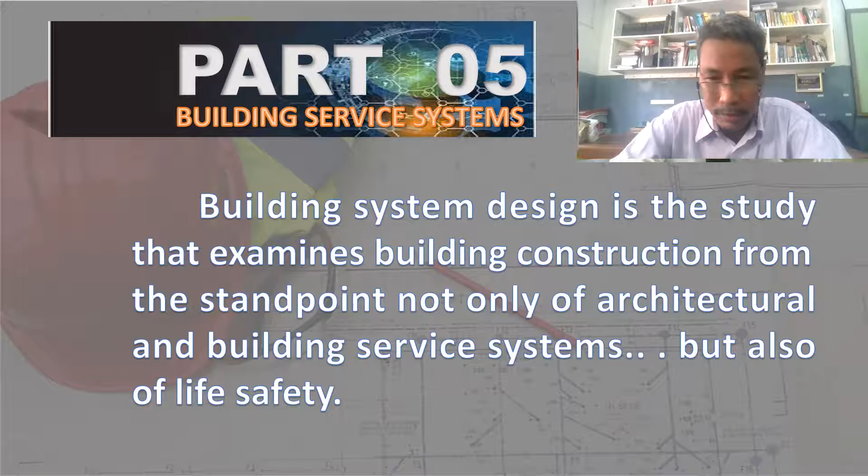I repeat, building system design is the study that examines building construction from the standpoint not only of architectural and building service systems, but also of life safety. So what I'm talking about from CHED CMO is they indicated 5 different service systems: lighting systems, mechanical systems, plumbing systems, electrical, communication and security systems, and fire protection systems.

So they missed out something like sanitary. So there is what we call sanitary systems and sound or audio. There are systems that I know in practice, in personal experience, that we have to control the sound. For example, in a building with an auditorium.

So right now, I have a background, which is a webinar, a seminar in the auditorium with too much audio. Okay. So the audio is controlled beautifully. That's why it goes a long way. With a very small amount of energy, we can actually efficiently broadcast a very good quality of audio, like in our auditorium, in our background.

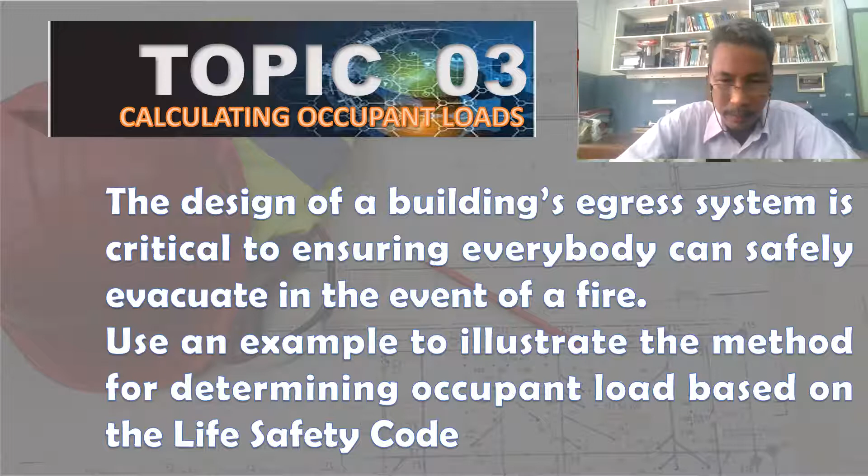And currently we are on number 3, which is about occupant loads and number of exits. In this topic, calculating occupant loads, the design of the building's egress system is critical to ensuring everybody can safely evacuate in the event of fire. We will use an example to illustrate this method for determining occupant load based on the Life Safety Code.

And at the end of this discussion, the student must be able to: A, calculate the occupant load; B, determine how many exits are required and how wide they have to be; and lastly, letter C, design the occupant load capacity of a building. So we'll start with letter A.

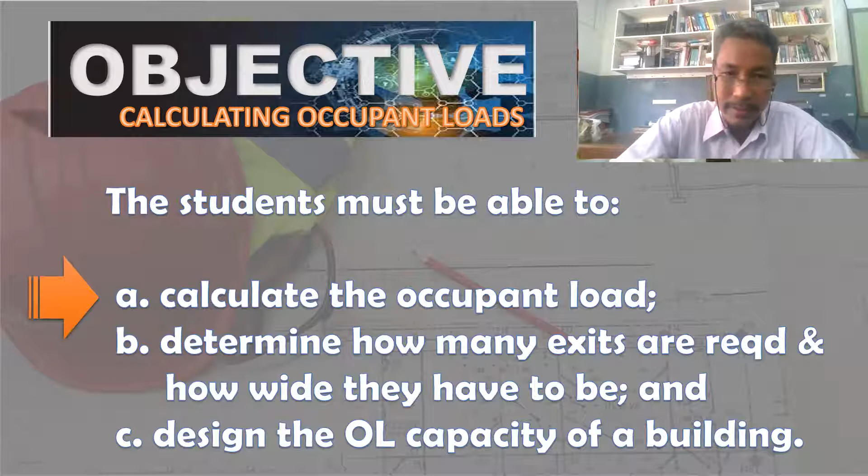So let's discuss what is occupant load. What does it mean, and what is its difference from building capacity or egress capacity of the building.

Technically, occupant load, or OL in short, is the capacity of means of egress for any floor, balcony, stairs, or other occupied spaces. And it shall be determined by dividing the floor area by the occupant load factor assigned to that use. So this statement can be converted to a very simple formula: OL is equal to floor area divided by occupant load factor.

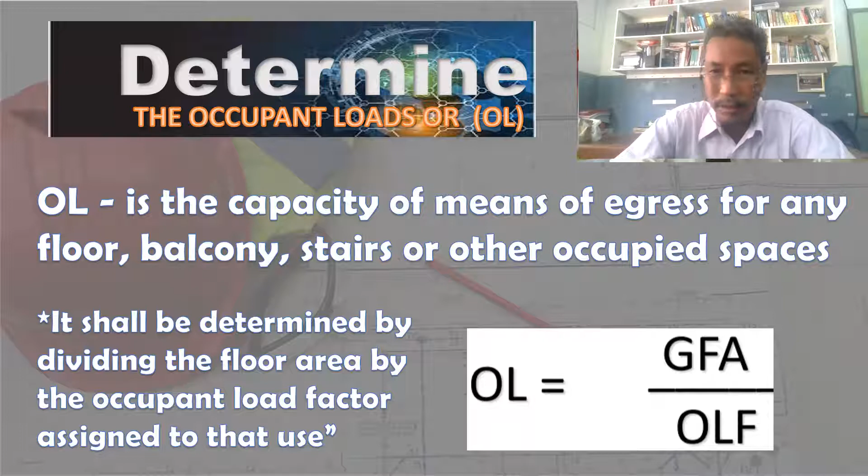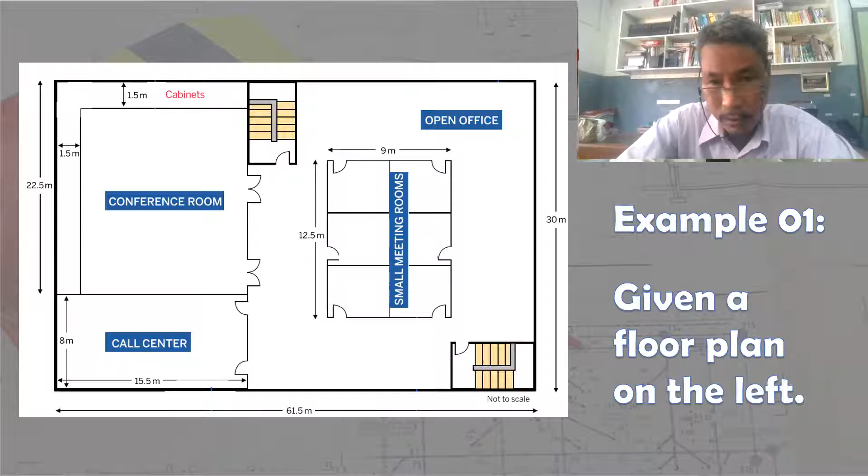So if you divide this space into 6 different small rooms, we can say that it is less than 41.8 square meters per room. So therefore, we will use the part of the table which specifically states collaboration room with less than 41.8 square meters in area, and that is 2.8 square meters per person as the occupant load factor.

Let us bear that in mind and go to step 2, wherein we actually select the occupant load factor, starting with conference room. So what is a conference room? A conference room is a place wherein there are plenty of people listening to a discussion or participating in a discussion. So therefore, a conference room is somewhat like an assembly of people. So assembly use.

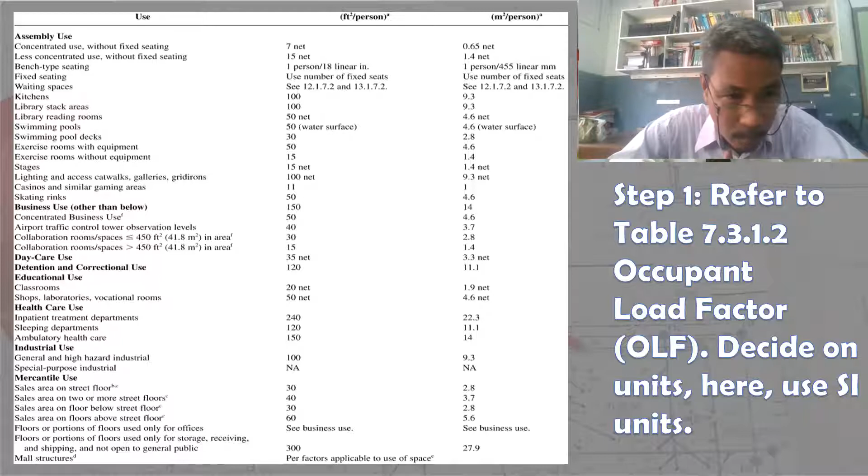So open space is again a business use. Okay, general business use. So we have what in our table again? This is business use, about 14, no? 14. So this is 14 square meters per person. Okay, business use.

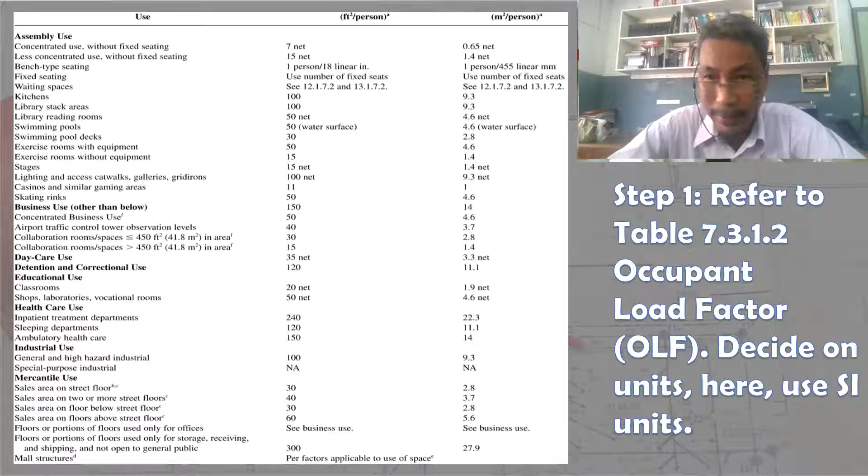And the third one is the call center. Okay, the call center room is again a business use. There is no direct selling of goods and services there. So let us classify that room from the table. We can say that it is a call center. It may be what, a concentrated business use. One call center agent is actually sitting side by side and back to back with other call center agents. So you can imagine this space in real life as some sort of internet cafe. So 4.6 square meters per person as our occupant load factor.

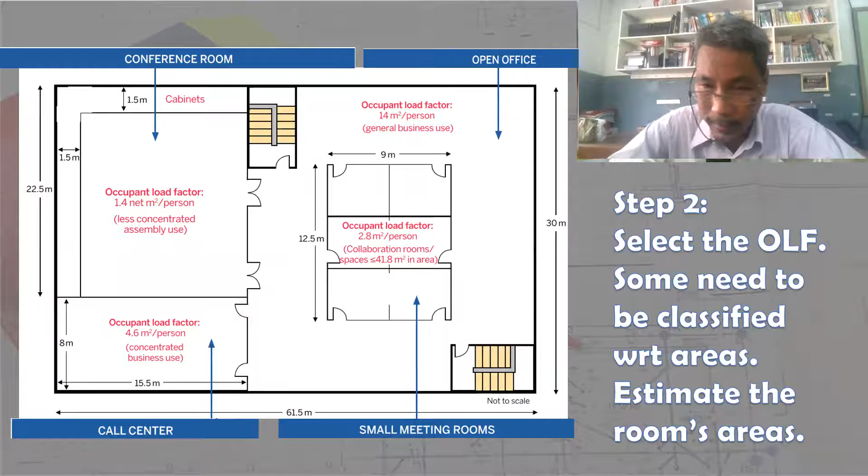And lastly, we have small meeting rooms, which we already discussed and estimated. So we have what? Collaboration room, which is 2.8 square meters per person. So after selecting the proper value from the table, we have to go to step 3, which is to compute the gross floor areas. So let us compute the gross floor areas, and in general, that is the case unless otherwise specifically required to compute the net floor areas. So let us do that. That is step 3.

So let us start with the conference room. As you can see, the area is 15.5. Okay, I'm talking about the conference room, the room on your upper left-hand corner. So 15.5 by 22.5, that is the dimension of the room. However, as you can see, there are cabinets on two sides with dimension 1.5 meters. So let us subtract the areas for cabinets so that we are left with the proper area of the conference room. That is 22.5 meters minus 1.5 meters, our length, multiplied by the width, which is 15.5 meters minus 1.5 meters. And that product would be what? 21 meters by 14 meters, which is equal to 294 square meters. Okay, so that is our step 3.

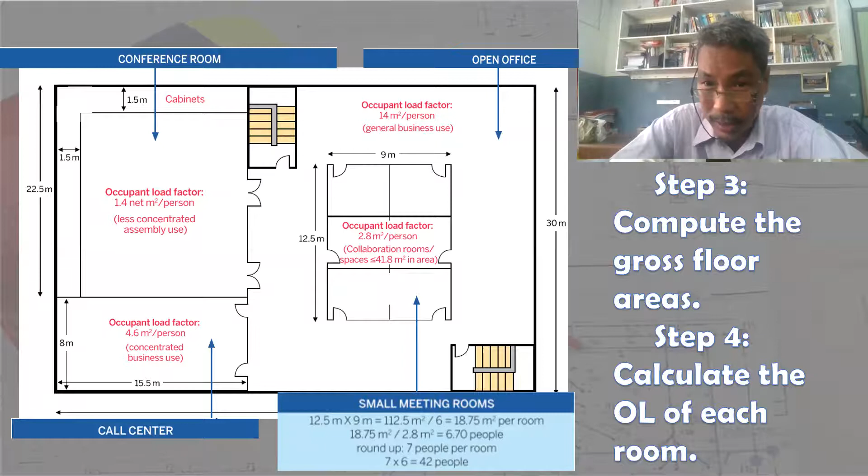And lastly, number 4, small meeting rooms. Again we have 12.5 meters by 9 meters, which is the total footprint of all 6 meeting rooms. That is 112.5 square meters, divided by 6, so that we have the area for one meeting room, 18.75 square meters, which is, as we estimated from the previous step, less than 41.8 square meters. And therefore, we can only use what? The collaboration room spaces with less than 41.8 square meters, which is 2.8 square meters per person. So 18.75 square meters divided by 2.8 square meters is equal to 6.7 people. Let us round up to the nearest digit, that is 7 people per room. And there are 6 different small meeting rooms, so 7 times 6, that is 42 people.

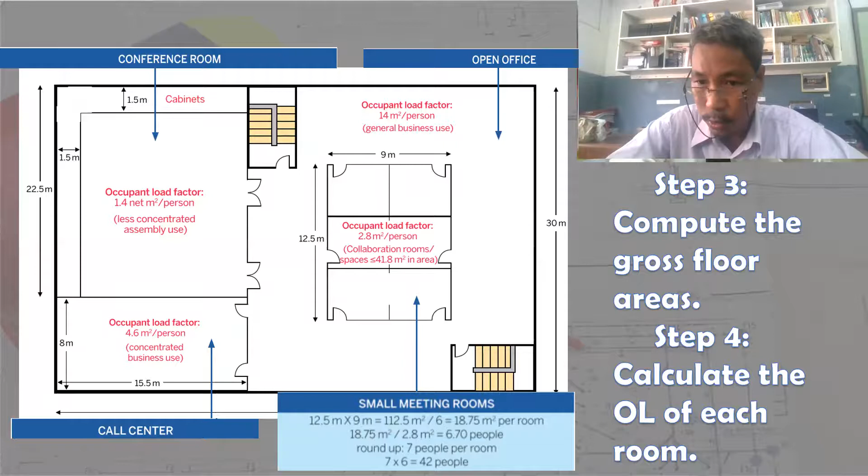Okay, so this means that we already finished proceeding with the process steps 1 to 4. And in step 5, we have to calculate the total occupant load. So conference room 210, call center 27, open office 91, small meeting rooms 42. Adding all of them, we get a total of 370 persons. So the occupant load for this floor space is 370 persons.

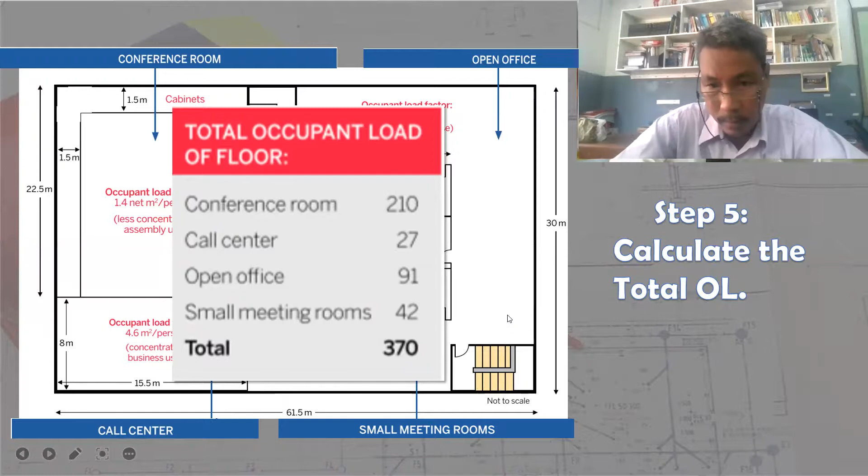And that is the end of our module on calculation of occupant load.